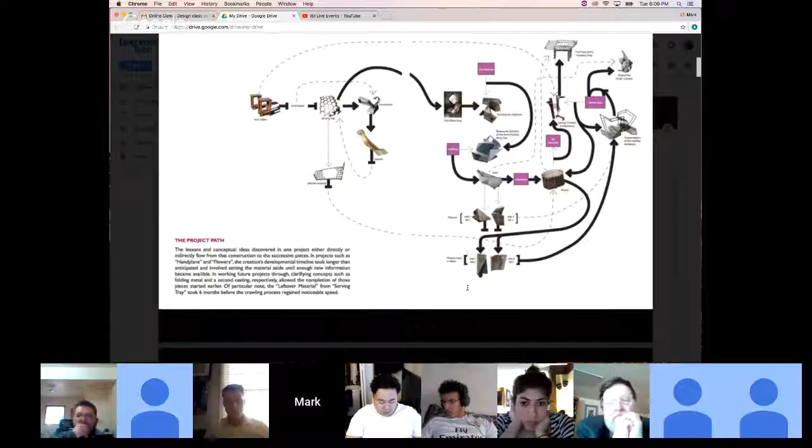This is kind of a diagram that talks about the project path, or the critical path, that the process of design took them in, and they took a few moments to document that path in a graphical way, and I thought that was a fairly interesting approach.

I've always loved this one. This was from a few years ago when we were dealing with missing middle housing.

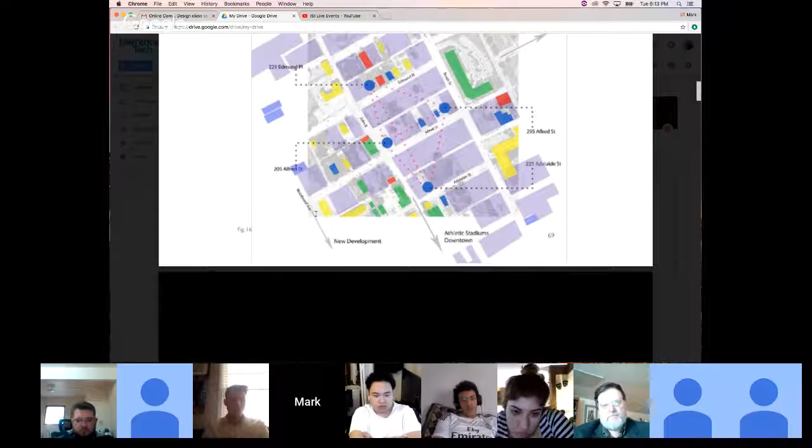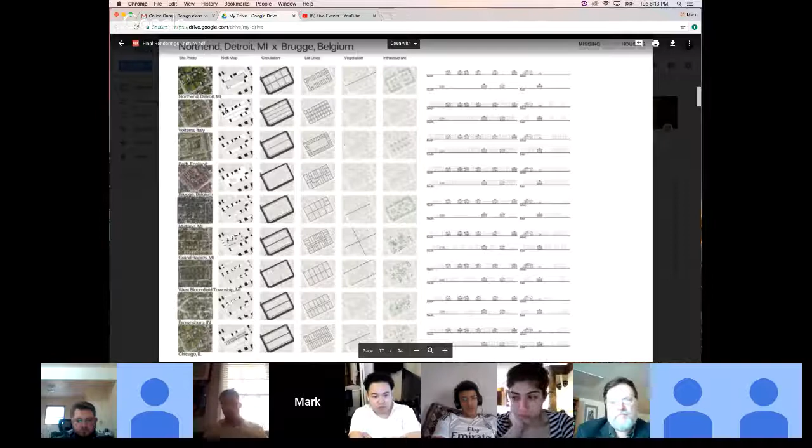Case studies. I love this one because it takes a look at a whole bunch of places like Volterra, Italy, Bath, England, Brugge, Belgium, Midland, Grand Rapids, and West Bloomfield, Michigan, to name a few communities. And it shows us what they look like all at the same scale, so that we can understand those communities relative to one another and understand them by comparison. This is an interesting approach.

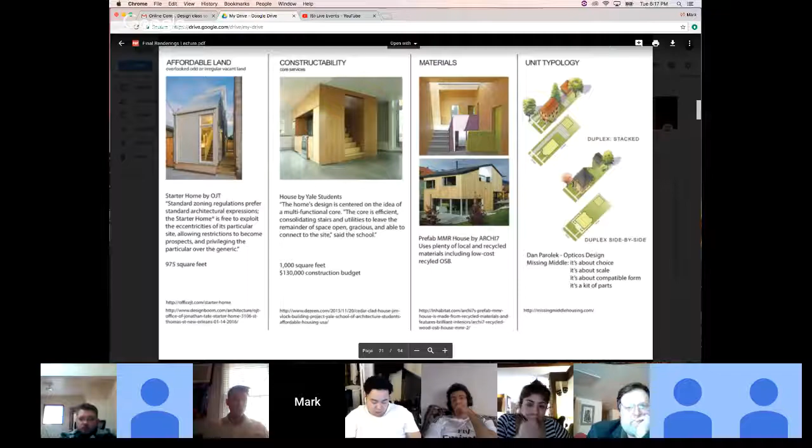Talking about program, the agenda for a building in terms of its use and square footage, and how you document that, and how those uses and percentages relative to the distribution of that program throughout the building can be graphically measured and quantifiable.

Again, the palette here is pretty restrained, but it's fairly consistent. And sometimes that program can be rendered or described in 3 dimensions. And sometimes it can be described in color, like this bar graph off to the left. Each of those colors indicates a relational value relative to the overall. So the program and area distribution chart on the left relates to the architecture on the right. And the palette here is off the chain. It's really, really beautiful stuff.

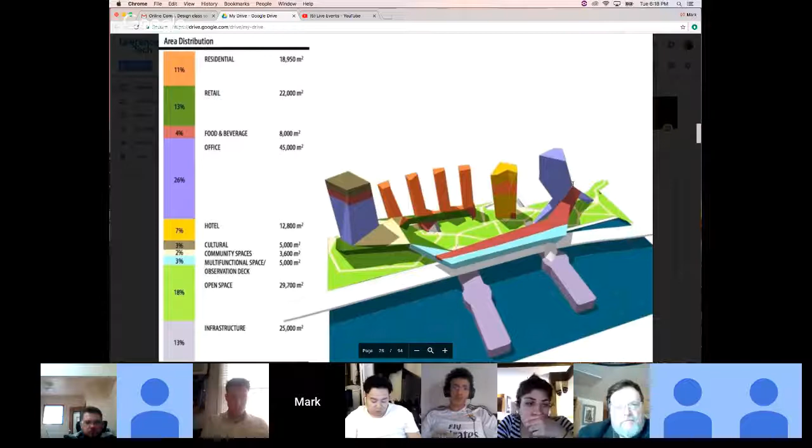Conceptual design strategies. How is it that architects actually illustrate the things they're thinking? A lot of us maybe just sit down at the computer and somehow start drawing there. But if you look at what architects have done before, they have other tools to create the sort of juices to create the possibility of making creative outcomes that are maybe a little different than simply moving right into Revit to start designing.

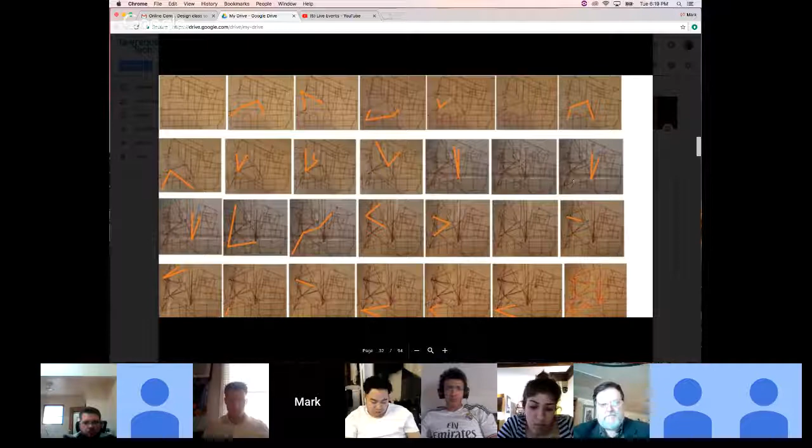Looking at variations on a site and how one can understand the sort of overall order. Or looking at iterations. Iterations are variations on a theme, and it's important that you take a moment to document those iterations to show us the sort of infinite possibilities.

Looking at iterations by showing how a concept, or in this case the idea of the Toronto stack, can be modified or changed, showing how that can happen in a very simple diagrammatic way.

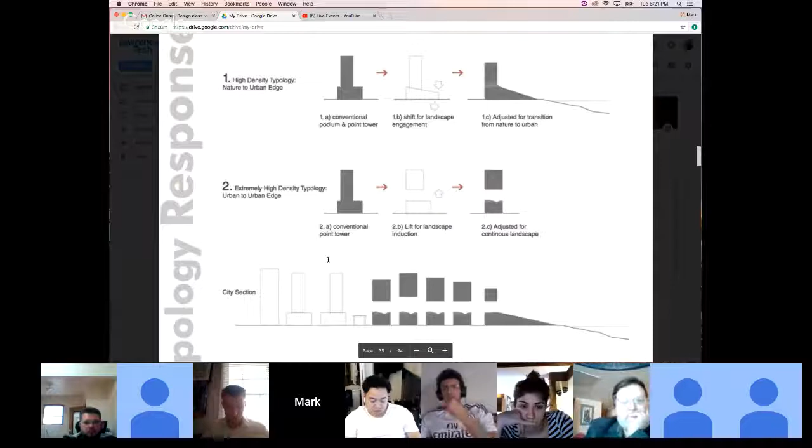Here, looking at how a mass—someone's knocking at the door—how a mass can actually be described and how it can go through a series of subtractive moves. So you're seeing that happen in this diagram, and you'll see that in another moment.

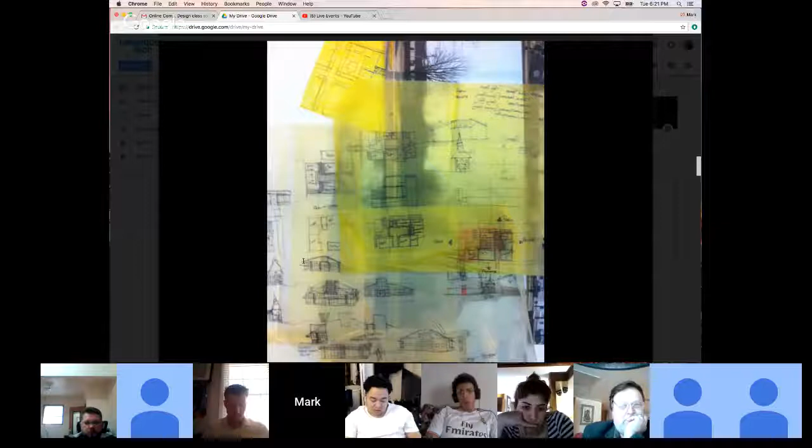This kind of brings a tear to my eye. These are hand-drawn drawings on onion skin, showing thinking through the end of their pencil. This is a beautiful drawing just showing the city of Cincinnati, showing major circulation routes and connection routes throughout the city relative to the river.

Here is a site plan that is actually printed with acetone onto a sheet of MDF board, which is the very desk I'm sitting at, which then has a series of other objects like the legend at the bottom and line work with strings to show connections. A beautiful drawing—a site in Anchorage, Alaska, showing the downtown core and the subject site.

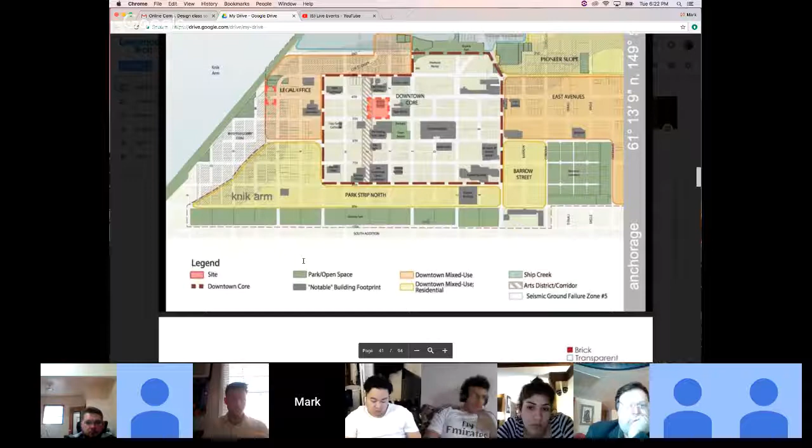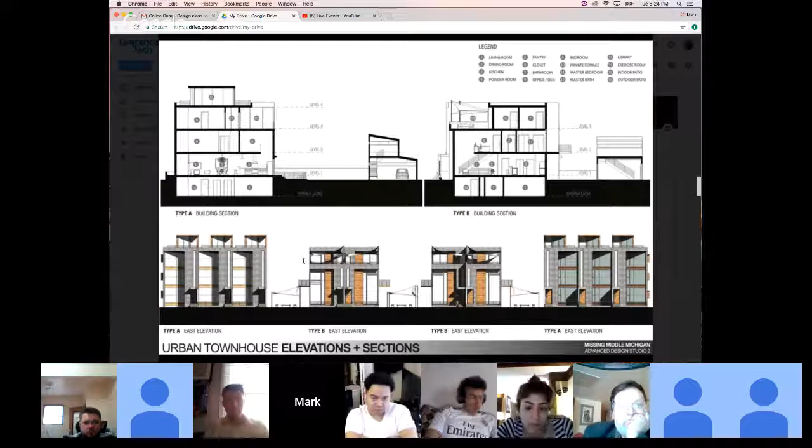Here's an elevation and a section operating at the same time. Notice how the background helps to contextualize the architecture. It gives it a ground on which the section can sit.

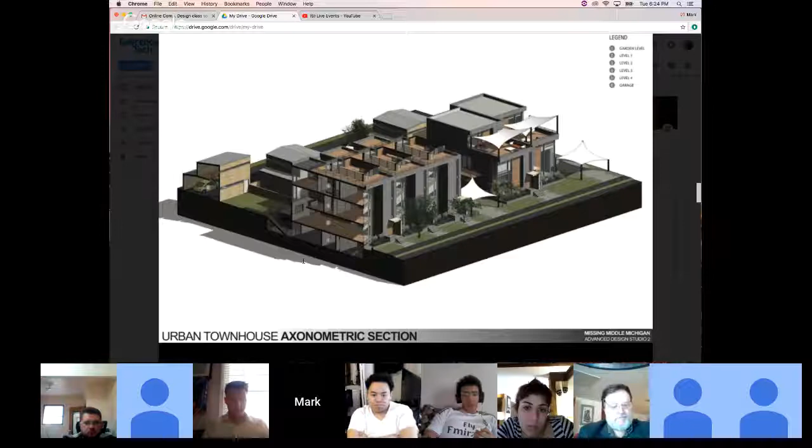So again, the expectation is that you're producing this semester some of the most beautiful, thorough, comprehensive work in your portfolio, because we expect it from everyone else that came before you.

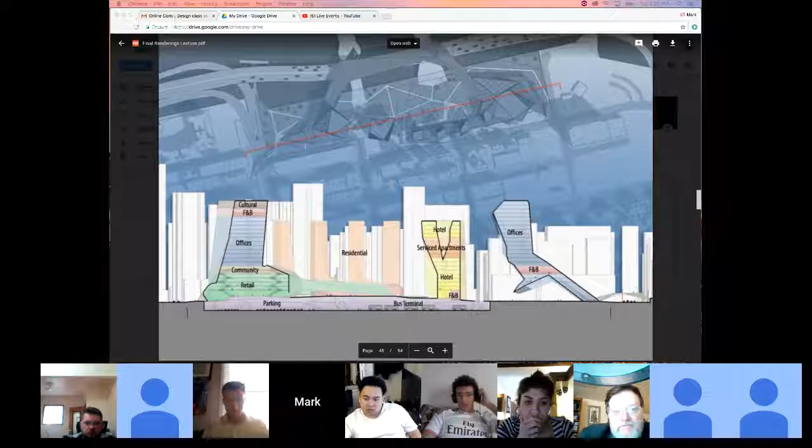There we are, we lost you. I want to make sure we get the screen back. Okay, so the section here begins to show again the site plan beyond, and it's a beautiful drawing, suitable for framing. Can everyone see the section drawing still? Thumbs up? Nope, I've got it on screen share still. Click on the screen share icon on Mark's image. Is that better? Yes? Got it. Yes, working for me. Okay.

Sometimes these drawings are more conceptual, like this one. Sometimes they're more traditional, like this one. And what's interesting here is that this section drawing through a small intervention is also an elevation drawing.

This is actually several years old now. You know, this is kind of intriguing. This is a drawing that reminds people my age of the old blueprints where everything was printed white on a blue background. And this Revit drawing was created in much the same way to evoke that sort of historic document.

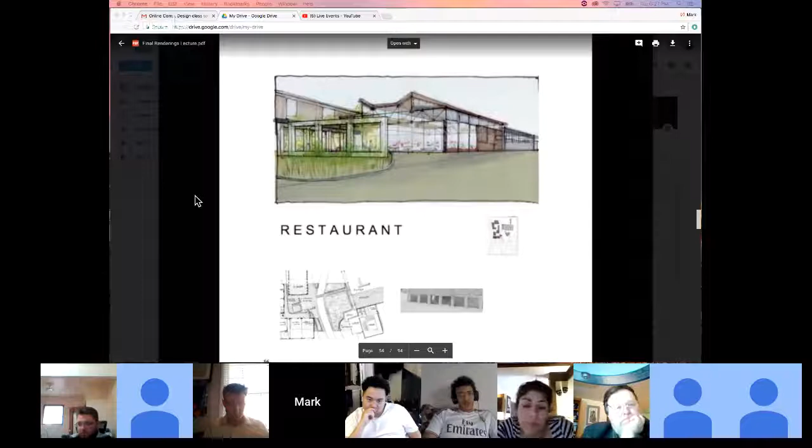The media, you know, these are hand drawn, colored with marker and pencil, and then taken into Photoshop to stitch them together. This was magic marker and colored pencil, a quick sketch that just shows the essence of what Joseph was trying to get at in his project.

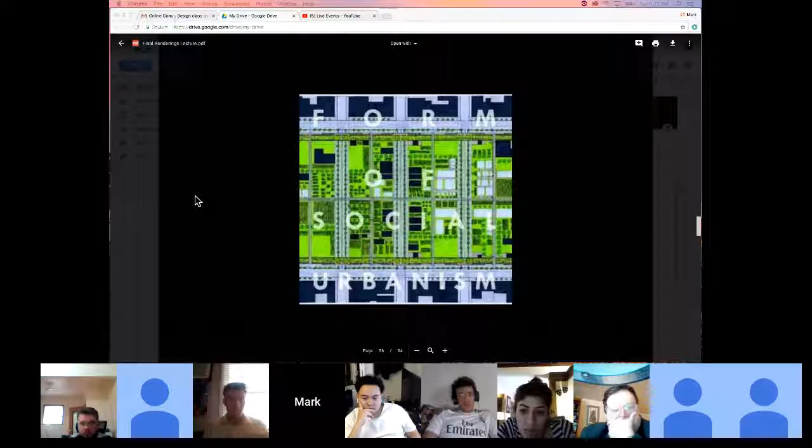This was the cover of Cody's book. So a site plan and a figure ground drawing became the cover of the thesis, as is the case with Rami's drawing for Cleveland.

A collage drawing where a place in Detroit has three sort of elevations to contextualize the site. So there's an elevation of photography here at the left, below shown upside down, and at the top also shown upside down, because the drawing is meant to be held in your hand and rotated to be viewed in somewhat of an intimate way.

This is both printed on board and then layered over or woven. So the site plan is actually a physical three-dimensional model. This is downtown Cleveland.

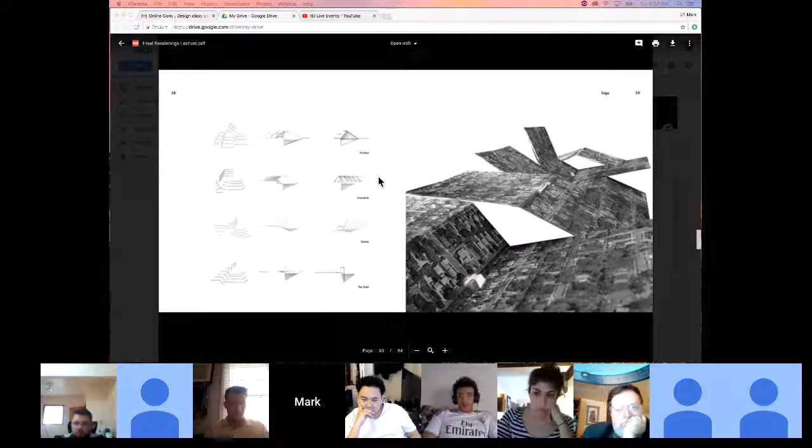This is taking the site and printing the aerial site plan on it and taking it through a series of folds to show what Caitlin was interested in exploring.

This was a student that took beeswax and took it through a process of some sort of disturbance to create a new three-dimensional iteration. Here's the Cleveland project, right?

Simple materials, like just a poster that they found in a garbage can and slice it, plaster of Paris and MDF board, metal - be careful not to cut yourself - cardboard, literally box cardboard from your Zappos shoes order, and taken through a series of disturbances. This is foam core.

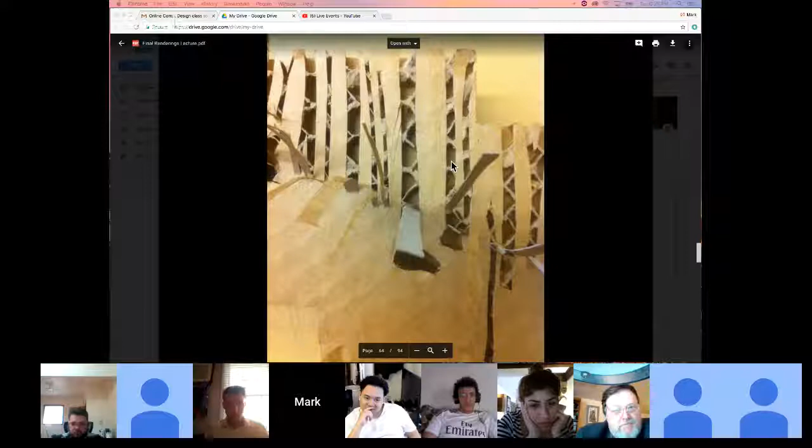These are terrific ways to delineate things. Plywood from your wood shop, right?

Full size - this is Irena's project. This is a full-size model.

Many of you will be doing work that makes it very difficult for us to select your work for fine grain. So this is a fine grain submittal. This is after the studio is over, and if you're nominated for that, you'll have to go through another iteration and pull your work together into one board.

And so this is one of those efforts where the whole project had to be reduced to one physical board. And then the renderings - so this is sort of like a blend of the Old Testament and the New Testament, looking at old school Revit renderings, old school SketchUp drawings, and then maybe some more recent things, right?

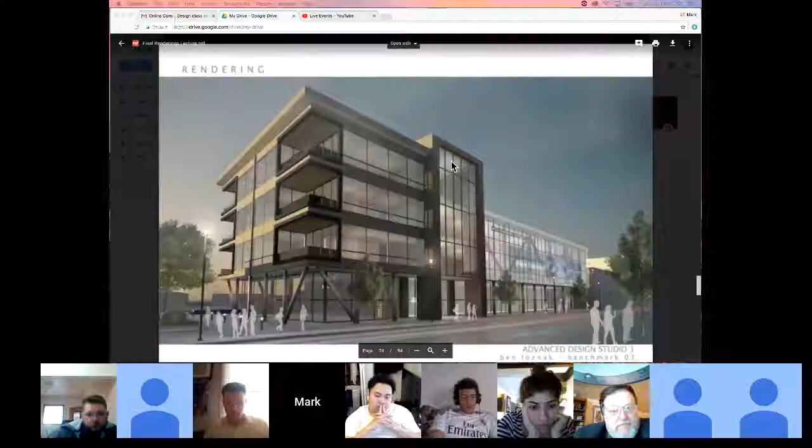These are all seniors and graduate students. This guy learned Lumion in one week.

These two are from a young lady. She's actually a practicing architect in Columbus, and she learned Revit in one semester and took Revit into rendering. These were her very first renderings ever in Revit. This one is actually a rendering in Revit taken through Photoshop.

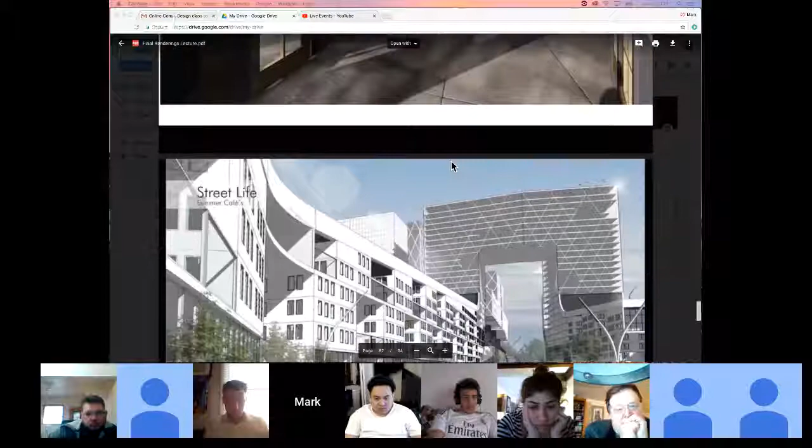This is the Lumion guy, another old guy that learned a trick. Old dog learns new tricks. This is the Toronto Stack project.

I appreciate this one because it's partially a perspective, but it's also showing kind of the cost of materials. This is the site section.

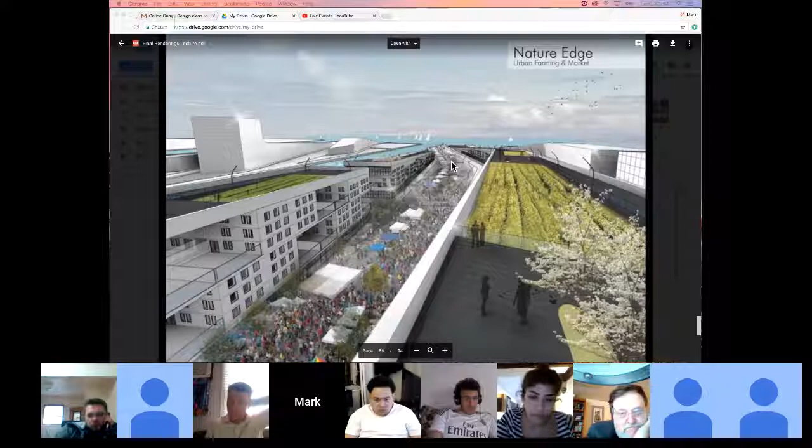And showing your building in moments of the year or moments in time. This one is a moment where the development was taken as kind of like a farmer's market. This one's taken, for instance, in the summer. This one's taken as a building is developing over time. This one's taken at a summer concert scene, but it doesn't have to be the beautiful North American weather. It can be wintertime or it can be fall.

Here's some fall shots. Night shots are particularly compelling - that moment, the twilight, the gloaming hour, is a particularly compelling time of day to show your work.

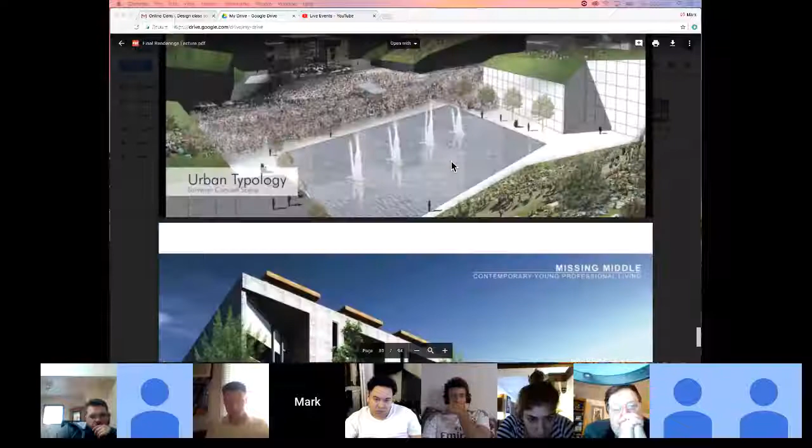Yeah, I wanted to go - actually, I should show you this, I should linger on this for a second. I wanted to show you these so that you appreciated everything in the context of what you're about to do.

So you're all going to be doing, you all have until next week to pull your projects together in such a fashion that they have colossal comprehensiveness. This benchmark review has higher stakes on your grade because it's a more important benchmark. It's kind of a dress rehearsal for benchmark 3. We don't expect everything to be done, but we certainly expect that you're dealing and confronting with lots of issues that are not only design-based, but technically based.

So I wanted to make sure that you saw these renderings so that you saw what you're up against, that your classmates before you - in some cases that's like 10 years old, 8 years old - but in many cases this is work that is exemplary. I'm looking forward to adding your work to the next edition of this talk. Definitely start thinking hard about those shots, and I'd be interested to go over those viewpoints with you, those perspective points, as you make your way into the coming week.

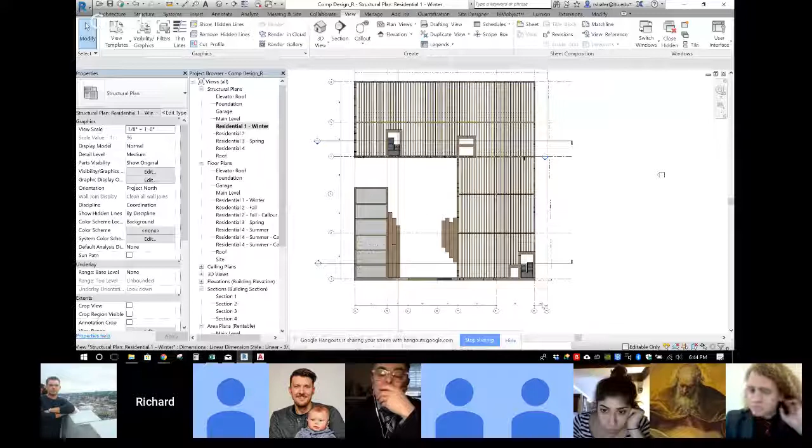Go ahead. Oh - so hold on, let me show you the details that they have. They only have this one, which is only a single floor. So I'm gonna contact them to see what they do for multiple floors. But as you can see, they kind of just anchor it into the wall, because the walls, with the Sirewall, they're reinforced with steel. So they have rebar running through them. Let me see, not this one.

So most of the time for load-bearing walls, though, you have fairly closely spaced joists or purlins. And when you have a beam with a large spacing on it, you're putting a large load on that point of the wall. So it might be a safer alternative to consider that to be like a pilaster - in other words, where there's a column in a sense built into the wall at that point, or a thickened wall. Does that make sense? Yeah, I would probably suggest that based on what I see.

Okay, the idea of using a steel plate to bear some load is not a bad idea. And the reason I bring that up, Richard, is because when I recall what you guys showed for sills and headers at window openings cut through these rammed earth walls, they had a similar spanning condition, right? When they had an opening, they treated it with a different material so that water didn't get into that opening from below at the sill, and the rammed earth had something to sit on and translate the loads out to the jambs so that it could return to its more vertical direction after the opening.

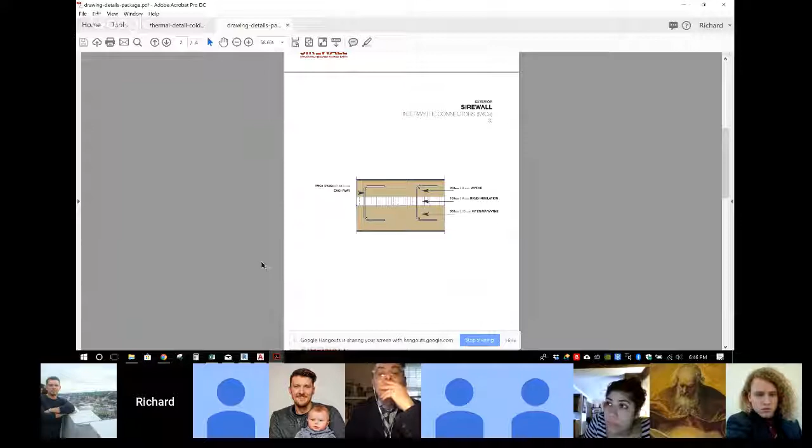Do you guys have a section through this new proposed structural? We have a preliminary one. Let's see it. Not really, or just open it up, and we can talk through it.

I just want to make sure I understand, because when I looked at the framing plan, Richard, it looked like those trusses that comprise the second floor - or is it the second floor that you took it at? - that those were fairly close together? Yeah, I have them at 16 inches right now, before I do the calculations and everything, just for prelim.

Are those like a pre-engineered wood truss or steel trusses? They'd be the wood truss. I looked in the Studio Companion book, and I got the sizing and stuff out of there. Is this a CLT system? No, it's not cross-laminated timber? No. Okay.

I haven't copied it up to the other floors yet. So the rammed earth goes up past Residential 2? This one right here is just the timber column. I haven't done the rammed earth yet there. That column was taken, it's on the section on the other side, right here. Gotcha, okay.

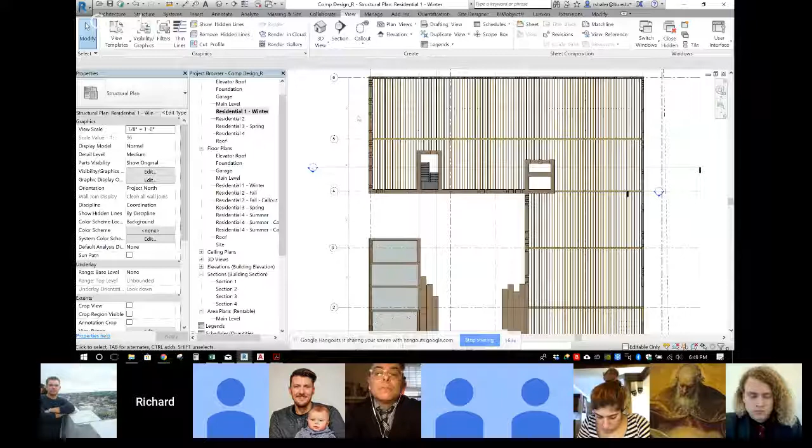Waffle slabs are more expensive because of all the coffering, and I'm not sure I've seen them used for parking because of that cost expense. This would be above the parking, so it would just be for the main floor. Again, unless you're hitting that 45-foot span limit length, I would probably not use it. I think the cost will go up.

I'm not sure you're going to gain that much from it. At 33 feet, you can span it with a two-way or one-way slab with beams. Okay, that makes sense. To answer your question about two-way or one-way: if it's a rectangular bay where there's clearly a long dimension and a short dimension, probably one-way. But if your bays are squarish in profile, then I would say two-way.

The majority are rectangular. There are a few that are really short, like this one right here - short and long, but other ones are like this that are square. Again, if they're predominantly square, use a two-way. If they're more rectangular, where the difference between one side and the other is roughly 1 to 2, then use a one-way.

Cody, did you want to talk about the HVAC? Yes, do you mind if I screen share?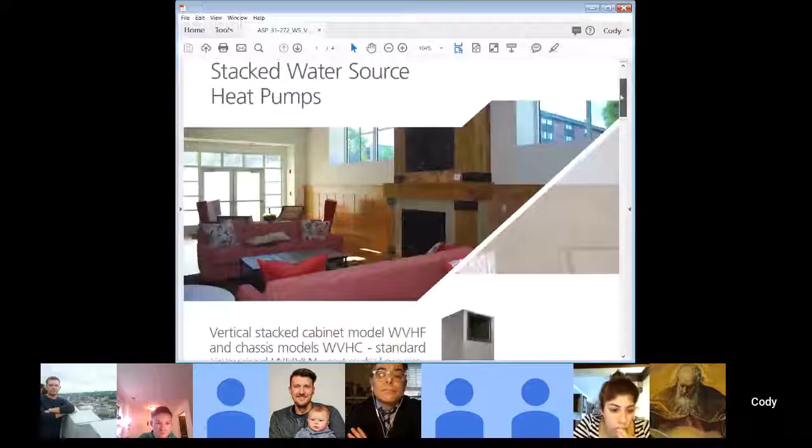The stacked water source heat pumps - so we are going to move forward with that for the heating and cooling of our building. As you can see with this diagram, that is a system that, as the name implies, is a vertical system, and we would be able to move it through all our rooms in the same location. It's one of the more efficient systems that we could employ within the building.

I don't have anything on Revit yet, but if you have anything to say about a system like this - I think this is consistent with one of the options we gave you. I think you just have to make sure they are placed on an outside wall, or is that the case?

The question I was going to ask is, do these things draw air in from the location on each floor, or is there a source where we can determine where it draws in fresh air? As I said earlier, if you put them inboard away from the exterior wall, you typically have to have a line of connection with a duct that pulls in air from the outside. Somewhere the system has to pull in fresh air and has to expel exhaust air. Frequently these systems tend to be along an outer wall because then there's no ductwork chase needed - you just simply have a vent or screen on the outside wall adjacent to the unit. That's my experience with how we solve that issue.

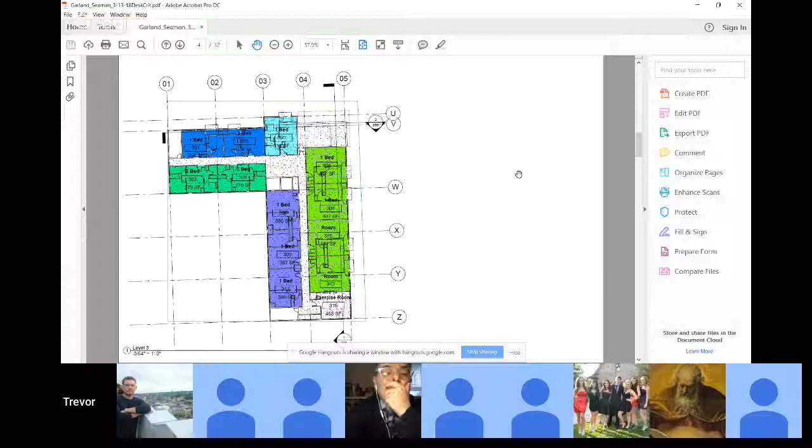So we have it down to 7, and then 1 to 2 bedrooms in terms of square footage. So this would be level 2, and they're color coded based on the unit square footage and orientation — that denotes each of the 7 different sizes and shapes of units that we have. Going up to 4 here, and then 5. This is still kind of a work in progress, but we have that palette we've referenced in earlier presentations that is going to correlate to this, and be laced into a comprehensive presentation so it'll be an easily recognizable reference.

So can you guys zoom in on the 1 bedroom near column W3, the purple one? I see. What is the space you're entering in when you go into unit 507?

This space here? Yes, that'd be the kitchen/living area. Would exist immediately to your left, and then the living room would exist on the exterior wall. Okay, and then the sleeping room is where the 386 is. The bathroom is behind the closet.

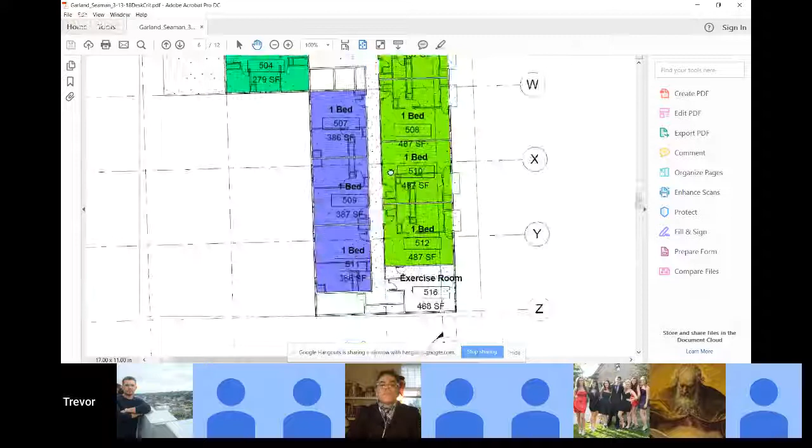I have a question on the lower right corner, which is the exercise room. Yes, I guess a question for Professor Farlow is whether that kind of space would be given away to a unit, or would you give it to a common area? So we've talked — I saw that and I raised my brow as well, and I anticipated that we would be talking about this.

If I had any influence on this conversation, either working with these guys in the office, or working for the owner group as their in-house architect, I'd need to be really persuaded to give up that prime real estate for an exercise room on such a high profile condition. Bear in mind that east facade looks at City Modern Detroit and towards Eastern Market, and the south facade, while it only has one window currently, could have more and could look towards Ford Field. The only thing is that south facade is looking right at the other building.

I understand that, and that's how you have to contextualize your explanation—that's the case you have to make. Yeah, that was my reasoning, to give that south wall so the units across the way in that building aren't staring into the units in our building, and vice versa.

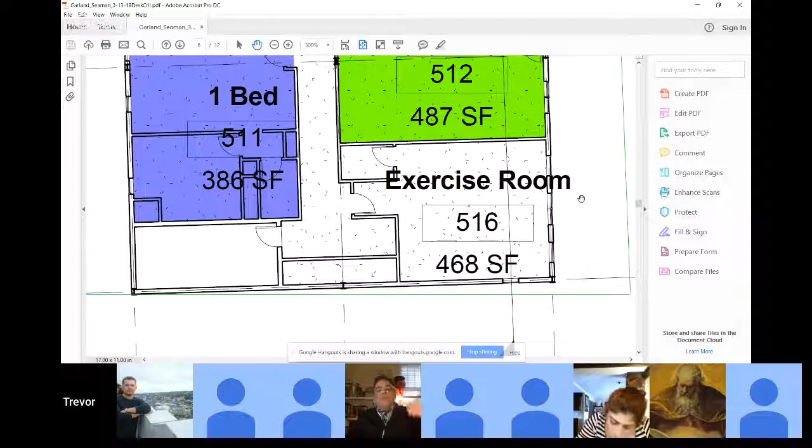We would give that south wall to the public spaces, the egress spaces. So Alec, what happens on like 416 or 316? The units vary between an exercise room and a laundry room between floors, so every other floor there's a laundry and every other floor there's an exercise room. So it's a vertical public amenity.

The opportunity might be for you to treat that differently in terms of fenestration. The other opportunity is to change the mass, let it step back a little so it reads differently, with a material differentiation, given the common area role that bit is playing in the architecture, to emphasize its difference.

Can I ask what happens to the left of Unit 504? Keep going down and left—the right two here is bedroom. What happens there? That's an outdoor terrace with access to views of downtown. Is that only unique to this floor? The floor just below it, the 4th floor, has an indoor space with a smaller terrace as well.

Can I ask why you didn't consider moving the 2-bedroom to the left and putting that open space contiguous to the lobby and elevator? The reason I put the community terrace to that far corner is because it has the best visual access to the RenCen and downtown, because anywhere else in the building, the view is blocked by that 10-story apartment building to our south.

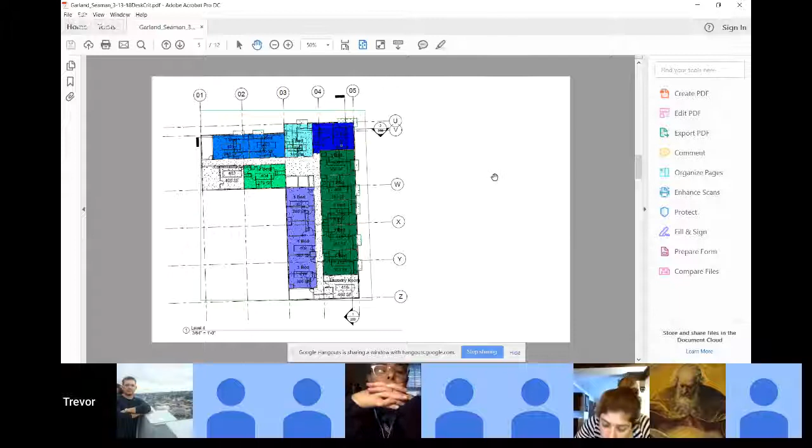And 6 of them are occupied on that wing. Going back to where we were finding the basis for our organization of these spaces, since we can't have balconies on the inward-facing units, the courtyards at least give some presence for those residents who don't have that opportunity yet.

I would also ask you to think a little about the noise and acoustic issues for Unit 404, because on one side is the elevator lobby and the other side is the community room. You understand my point? Yes. I'd say if things are too loud, that's a unit no one is going to want. If you could push it to the outer edge, then you only have one side adjacent to or butting a community space.

Yes, definitely—I'll defer to Professor Farlow on that. I don't know, we can look at that. Let's let you chase it this way. I appreciate that you have a position on it.

I don't know if 404 is better as 2 one-bedrooms, or if it's better as a 2-bedroom where the master is—it looks like the master is maybe the bedroom on the right, closer to the elevator, and then maybe the other room is a guest room. That's maybe how, as the sales team, you might unpack that. That's how I envisioned it in my mind, the master bedroom on that inside.

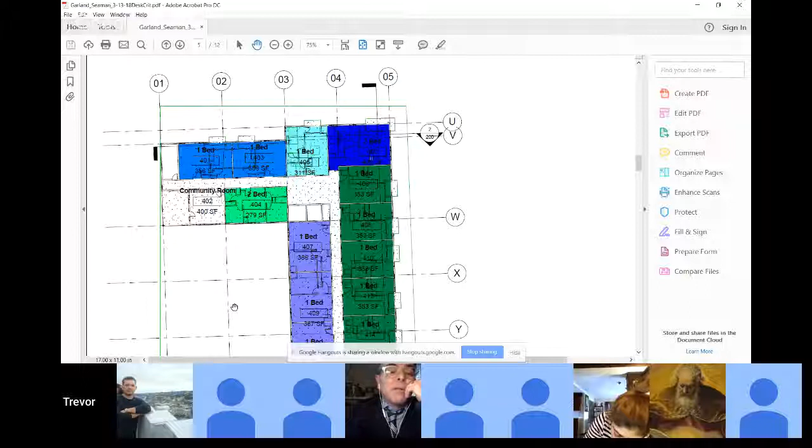It happens along the X line, for example. It happens along the 04 line. So, I mean, in some cases, I think the column in the unit is kind of like a virtue. It could be a virtue.

Yeah, the way I organized it was based on fitting these rectangular units into the facade, the exterior construction, with as few different versions of units as possible, if that makes sense. Because in previous iterations we had 14 different types of units, different shapes, different sizes, and the opportunity on that south wall of the westerly wing is to divide those spaces evenly so we get a matching unit.

Right. So you're learning how to do this, and it's a lot of fun, and you begin to appreciate the variations that this can actually produce. So can you guys maybe zoom in on U05? Can we just look at the relationship of structure to the outside walls?

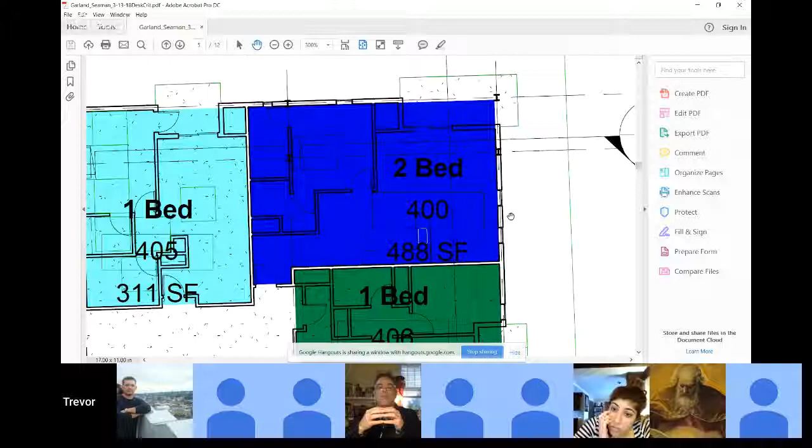Can you guys cut a section through this, or do you have a section? We need one through an outside wall so we can look at a column line relative to the skin. Did you cut one through the outside? We've got a building section. Yeah, that might work. There we go.

And does it have the columns and column lines shown? So the column lines—we actually linked our structural model in, and we were having some issues with the display of the grids, so I just turned them off to make it a little bit less confusing. Look on the left-hand side.

I think the easier thing for you to do might be to let the column lines stay where they are, but let the wall slip out past it. If you don't have a property line issue, I agree. We're already set back on all the property lines right now, so I'd flip it forward, slip it out. Yeah, I agree.

This conversation we're having with you two, Alec and Trevor, is something I want all of you to audit your own sections and floor plans for. I want to be real clear that there's no columns embedded in the exterior wall construction. They are within the volume of the space itself, within the dwelling unit or the retail unit, and the outside wall is free and clear of that—the real reason is so we have a difference between skin and structure, but also so we don't have thermal conductivity issues that bring the cold into the building.

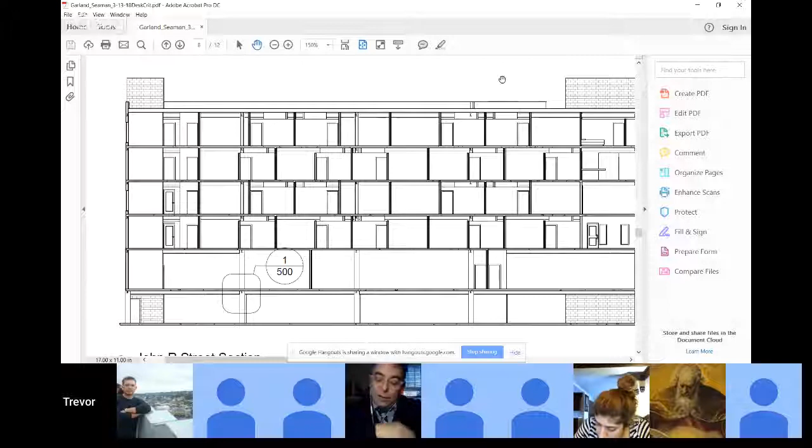Yeah, this is the week where we find this mistake every time, so you're right on time—there's plenty of time to fix it. This is the way it works in an office, and many of you know this: some bonehead boss like me comes around and says, 'What the heck are you guys doing, don't you realize that,' blah blah blah, you get the finger wagging, and then you have to go back and recalibrate the whole model to make sure everything impacting this issue is resolved. That's what you have to do in offices. So you have to be kind of alert to that.

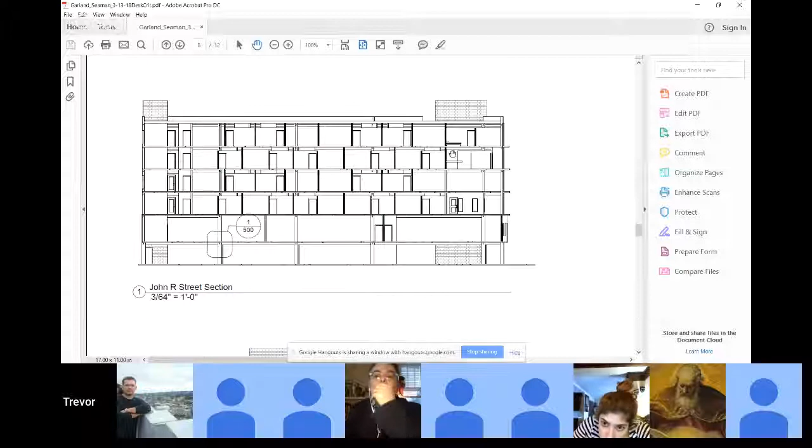Yeah, nothing I think will hold us up very much. I think that all makes sense, to pull the exterior walls out just a tad. And fortunately we gave ourselves the tolerance with our setbacks early on in the project to permit us to do so.

This section is kind of bizarre to me though, because I'm not sure where the grade line is. Looks like the grade line is the bottom line—is that correct? No, it's actually right here. That's what I thought, the parking. So graphically those things need to be tweaked too, so they read as sections, with the streets added in also, showing some cars driving in the lower level, people on balconies, and there's a slab thickness there—bingo.

Let's see, can we look at the elevations? Yeah.

Is the stuff at the ground floor just all glass? Is that why it's open? That's actually where the retaining wall is going to come in. It looks like it's solid to me. But the ground line is really at the 0-0 line, correct? Yes. I'm almost looking like it doesn't seem that there is much glass on the ground level.

Am I mistaken? The rectangular lines on that ground level, on the upper, in the north elevation—those will be glass, I just haven't placed them. And then again on the south elevation, all the glazing hasn't been completely determined.

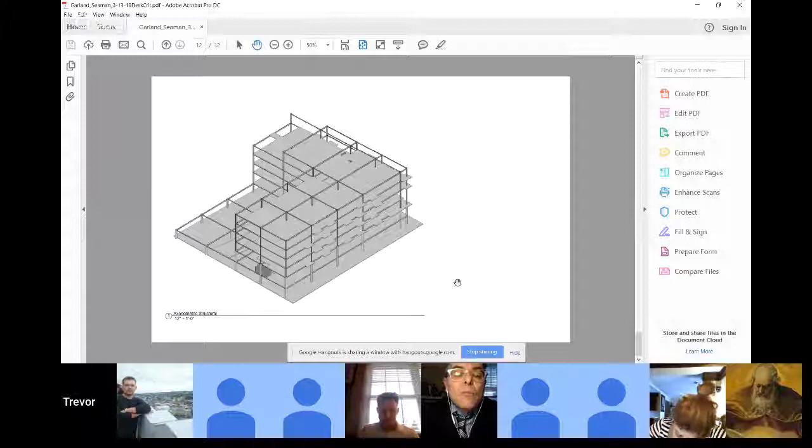What are some of the spans in the system? Some look quite long. These up here are 40, 46, 40, 48. That's the longest span.

What is your structural system? It would be composite steel and concrete columns, and then we were considering the post-tension concrete slab to work at those longer spans, but I've been struggling to find any really conclusive research about their spanning capabilities. Mostly what I've seen is just the relationship between the thickness of the slab and the span, but it was all about waffle slabs.

So is that post-tension system an all-concrete system with columns and slabs? For the floor plates, we were considering concrete for the floors, and then the columns on the ground and underground floors—the steel encased in concrete on those lower floors would continue up so that we could have a little bit more of that space for residential programming.

I would think that a post-tension system would be a lot like precast—it's got its own set of rules, so to speak. So I would probably be as familiar as I can with that system. I'm not sure, is it covered in the Studio Companion? It might be, it was briefly covered. There were a few little diagrams, but it wasn't sufficient enough to really understand it, I don't think.

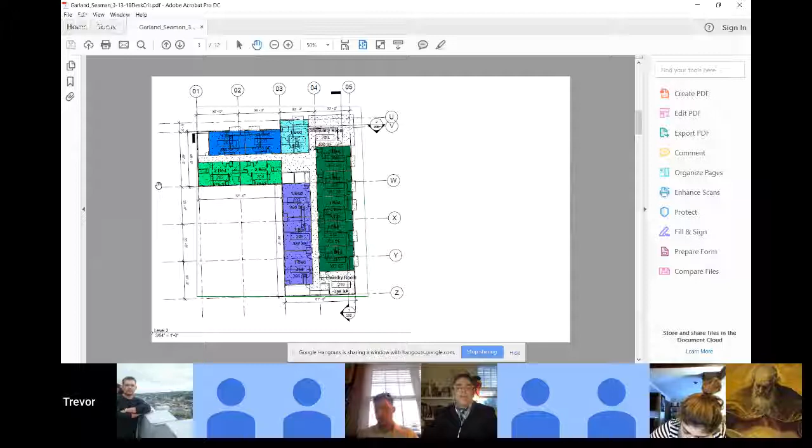Yeah, this is an older snapshot of it, but this is the basement floor. Now we have the ramp that's going to go through here. I thought the ramp was in the middle, like between 2 and 3. No, it is now. Oh yeah, this is a dated image, a dated drawing.

So I can't really help you now because I don't know what you're trying to do with the parking level yet. Right now, I'd say you got to be balls to the wall to get that resolved, because you may need to introduce a V.5 column line or a V.3 column line that's maybe flush with the south wall of that stair.

Yeah, I'm thinking make this work. I was thinking putting one at the demising wall of those rooms of the units upstairs. But again, it sounds great, right? In concept, sounds great, sounds like it could be workable, but I don't know exactly what the layout is. I can't remember what it looks like.

So I think you ought to get on that now, and then let's pin that up tonight or tomorrow. Are you talking about the parking layout? Yes sir, yeah, let's pin that down now, tonight or tomorrow, because you really can't spend any more time massaging that.

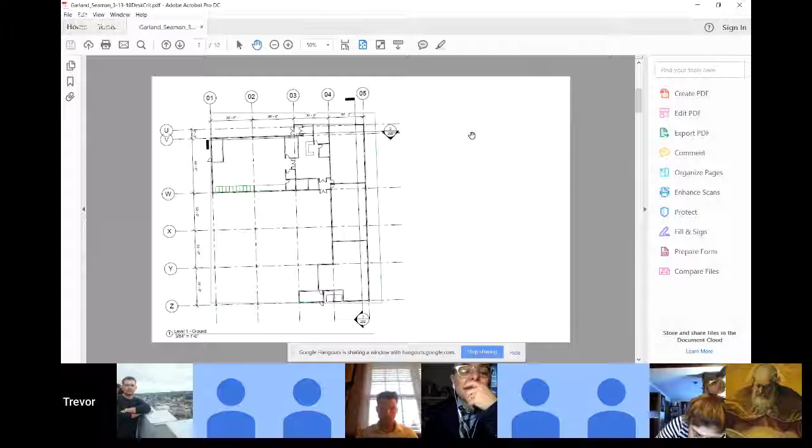I wanted to ask Professor Farrow a question. Do you have any idea how the cantilevering capabilities of that post-tension slab could be, so that if we do introduce a column or maybe slide column line V down a little bit, what we could expect to achieve on the outside of it?

Not offhand, it's not a system I'm that familiar with. What I'll try to do in the next few minutes is send you some information that you can take a look at - it might help you with some decisions. I would think that small cantilevers will probably work, meaning 10 to 15% of the span without much of a problem. Okay, I agree, all right.

Alec, do you want to touch on the HVAC at all? Sure.

You just go into the floor. Well, I don't know if the things will cover it up. So I reworked the HVAC a little bit to reflect what you had previously stated, that we need a unit-based system rather than a central system, even if it's by floor. So I provided the spaces on the balconies. Yeah, I see for that - the VRF units. Yeah, like the box. Yeah, the box just above the W. Right, right.

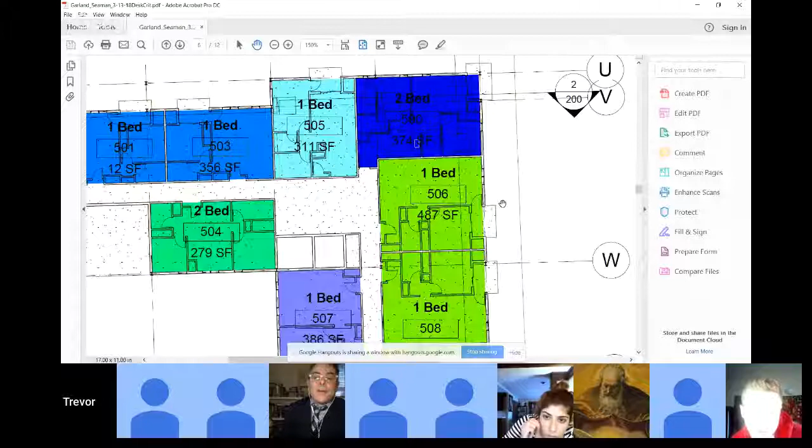Where it started running into issues, where it became a little weird, is on the interior, because we do not have the balconies - those boxes kind of... Right, and that's why I was suggesting in one of the other schemes that if you look at where your closet is in the bedroom - in some cases, let's say I'm looking at the bedroom in 507, right? Zoom in on that. Right. Yeah, if where that box is, the closet actually was in the wall that separates the two rooms, so that it kind of was an extension of that box.

Right, it would fit cleaner in that sense, right? It's just a question of, you'd have to decide how that works in terms of internal space planning, because now that makes the rest... that would push the bed to the other side. Right? Yeah, it might. But I think you can do onion skin layouts to show variations on that, right? I think that's another option, is to have put the box in the living room, and the kitchen, for instance, could have gone on the wall where 507 is printed, so it becomes one continuous condition within the room. And then you could actually imagine how someone could work around that - maybe they'd have built-in furniture or something in that, right? Does that make sense? Yeah.

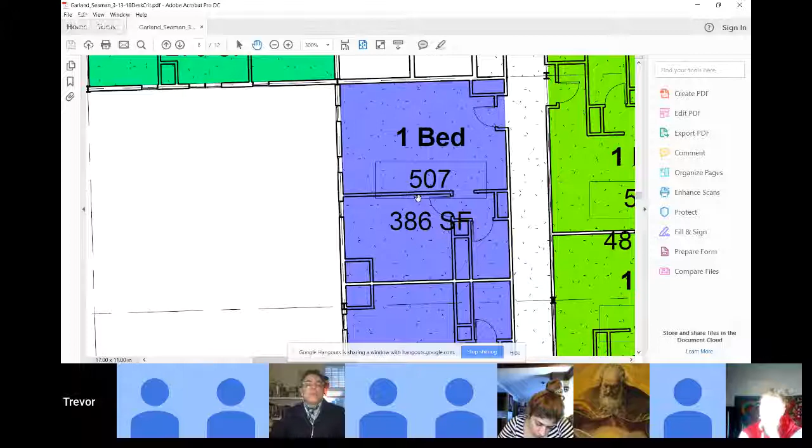But it's not, like I said, the end of the world. What I would say is maybe potentially an issue here, and that I noticed in the elevations, relates back to HVAC, is the size and number of some of these windows on the non-street side facades. I feel like these units are underprivileged in their amount of glazing, particularly in that 507 unit, where it's only one window in that bedroom, and it's a small, narrow one.

The other point I would make about the location of that unitized package unit: if you were to put it in the wall that divides, let's say, the living room from the bedroom, then you might be able to consolidate your ductwork. Because on one side you'd feed the bedroom, and the other side you'd feed the living room. That might be a more strategic location. Then you could split the thickness of that wall between the two rooms, meaning less intrusion on one space. And maybe it becomes a built-in bookcase on one end.

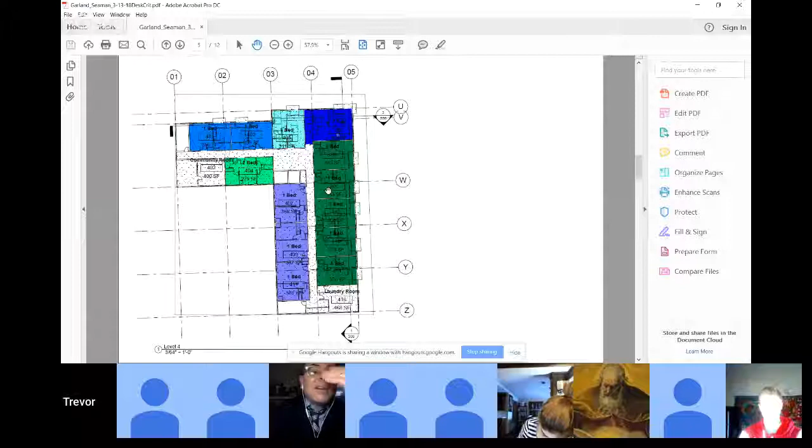But these are nice, simple units. I definitely appreciate that. Can we go back up to the 2-bedroom at the Notch on Alfred, or the 1-bedroom? Maybe it was another level. I'm trying to remember. Maybe it was the 2-bedroom on the corner at 04, the dark blue one. Yeah, that one.

Zoom in on that little closet. That's the bathroom there. What is that room behind the bed? That would be the restroom, that's the bathroom, right? And then the room that his cursor is on now is a walk-in closet.

So, getting back to window sizes, I feel like some of these windows can be bigger, but that's something you have to validate on the elevations. That's one thing. But then also, when you go through the meticulous move of the columns so they're not in the wall but inside the space itself, that door into the bathroom has to slide closer to the bed, and then a developer is going to start saying, do we need doors in all of these spaces? Do we need a door in the closet, for example?

That door times 4 floors is 4 doors, and there's probably 12 rooms on each floor. You know what I'm saying? That's the way they start thinking: how can we save more money? So maybe there are some rooms where you can get away without a door, because it's always going to be open. I think closets are those kinds of rooms.

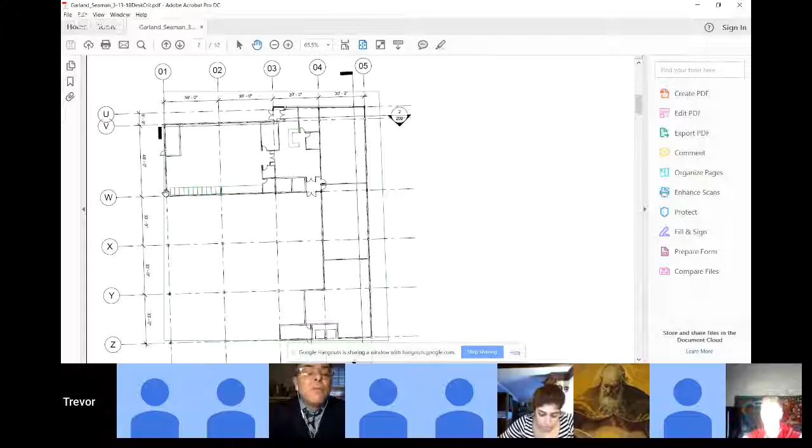So what happens on column V? What happens on that wall? What's there where your cursor is? That's where I'm unsure, because we can fit all the storage behind it. Let me share my screen, if I share my screen you can see. Okay, let me go to you.

So here, this is 30 storage units, and if they're stacked, we can get 60 in this space. So the storage can get even smaller.

This is the denotation for bicycle storage along this wall, and then we have a lot more space here that can be used for various programs.

Well, do you have like a leasing office, conference room or business center? Conference room over here in the lobby, an office right here, the front desk. This is the mail room, we're going to be putting mail in through the wall. Dog wash closer to the exit, then a changing room here for the bicyclists, and then the retail in the corner.

So this space here becomes an opportunity for you.

Well, think about what you'd like to see there. Maybe that ground floor can retract a little bit, come in a little bit, so it's not so generous. Maybe you can offer up bike storage in that room and the bikes are on the facade. That might be an interesting thing. Maybe there's a bike rental shop there, for example, a kind of quasi retail space. I could be persuaded to look at that as a program.

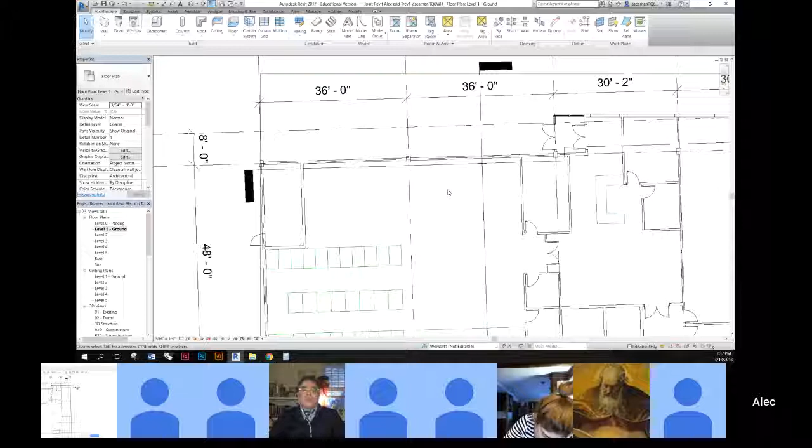But again, thinking hard about this, like you did relative to the laundry and exercise rooms upstairs, thinking harder about how these programs can activate the street and promote this building, its occupants, and the agenda of the building a little more clearly is maybe the way to answer the question of what this is going to be.

To me, it would make sense to have something that would be a community space. It would be like, I was thinking, a restaurant or a kitchen with a cafe for the residents, so it gets a sort of advertisement as you're walking down Alfred.

It might also help to know a little bit more about these rooms in terms of how they're working. I'm looking at doors to give me some sense of scale in these spaces, but how many people can go in that office, how many desks, how many chairs, how many conference tables or conference chairs can sit at the table. And if I knew that, or like the dog cleaning, how many dogs can you wash at a time, that kind of thing.

It would be helpful if you all brought up your plans to show the finer grain of the program, so that we could make sure you're on track.

But a business center might be useful, where you can go in, maybe there's a fireplace, maybe there's computers, maybe there's a coffee bar, maybe a small kitchenette, so that it's the living room that some of these smaller units you're proposing don't really have, and homeowners like me would come down to watch the golf match on Saturday afternoon, or to play bridge or whatever old people do when they play cards. So that's kind of the alternate living room.

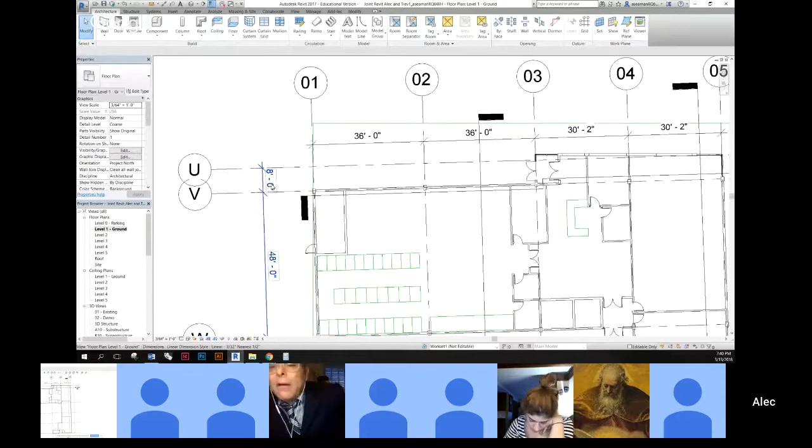Before you close out, can we orbit around the model and look at it from above?

I know Professor Farrow had some questions about the 1W column line and what was happening in those units on the Alfred leg from the south side. Can you orbit around and let us see that?

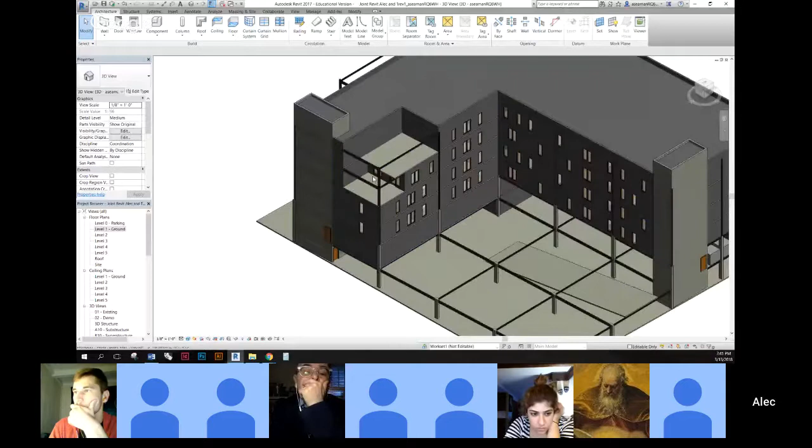Does the roof of that unit on 4 actually extend out and create a space? This space here is actually the community space, and then the unit starts past this column line. But doesn't the community space want to end at that wall, that corner? Yeah, okay.

Can you show us the hard corner at the intersection of the streets? There was something unusual happening there. Some of these columns would be removed, some of the structure cantilevered. This is the public exterior space that prioritizes the Ransom Gillis house. Yeah, that's very interesting.

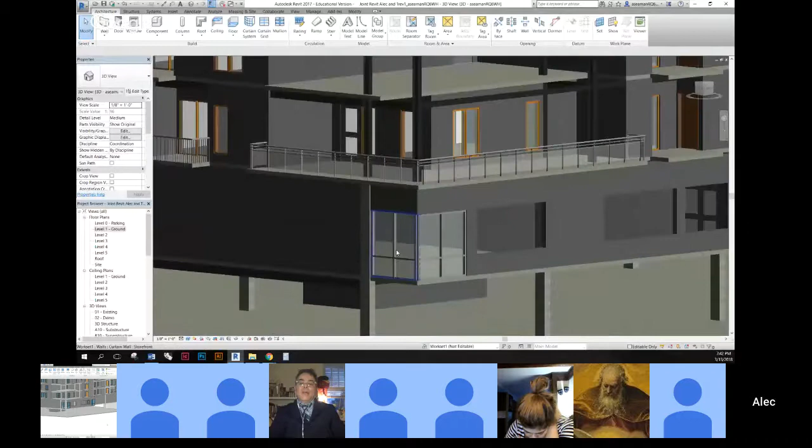The windows you're showing on the ground floor, are those retail windows? Yes, I think those go all the way to grade. I think that's how I would look at that. I wouldn't do those huge pony walls, the walls between grade and the sill line. I would extend those all the way down.

Like the corner, yeah. Because a developer will want to be able to tell a tenant, between when one lease ends and one begins, you can put the door anywhere in this wall. You don't have to cut any wall mass out to do it, or leave the door where it is. A large opening that goes from head height down to grade allows that kind of current and future flexibility.

So I would think of it in those terms, not just you guys, but everyone. Yeah, and the same goes for the whole exterior storefront system, because tenants might want to occupy a different percentage of that space, so you want them to be able to decide how much space they want. And when different tenants move in, they still want a similar expression on the outside, right? Yep.

And what were you guys thinking for the skin? So in our lab module we specified an insulated metal panel as a unitized system. For the glazing, we looked into what we could get the highest R value out of, so the most economical options were double glazing with argon encasing, low-E emissivity. So what's the metal panel - is there a spec, a company you're looking at?

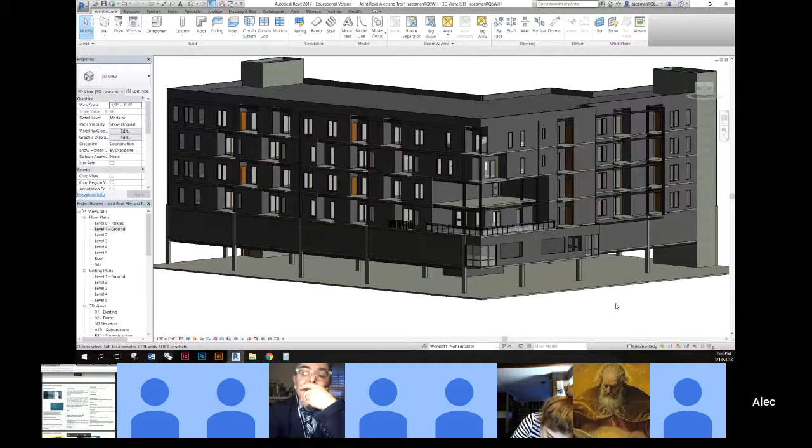Yes, it's in the lab, let me jump over real quick. Can it come in different colors, textures, and finishes? Because it's reading, guys, as - and I like simplicity - but it's reading as one thing, I just want to make sure. Our idea was to use the metal panels because they have some variants, we can change the color and texture to emphasize different portions of the building. Gotcha, so from the exterior you can differentiate between program - for example the retail, the community space, and the units.

So I don't know this line, Metl-Span Architectural Insulated Metal Panels, I don't know this company, where are they from? That's a good question, I didn't look into where they're from, I looked more into the product data and panel sizes, but I can look it up for you. I would try to - if they're not from the U.S., not because I'm promoting nationalistic sensibility, but for LEED points and a more sustainable, affordable, less exotic strategy, since metal panels can be local - even our good friends in Canada have wonderful metal panel products, Riverside Group in Windsor for example, Erie products have things there. These are somewhat local, so double check that.

But again, within one material choice, you can provide variety. My advice is to be calm—do subtle things, like change the direction of ribs or joints. Or if you're going to do all warm gray, maybe some have no texture and some do. Because you can compose a beautiful sonnet or symphony out of just a few notes, and that's something you want to start getting into.

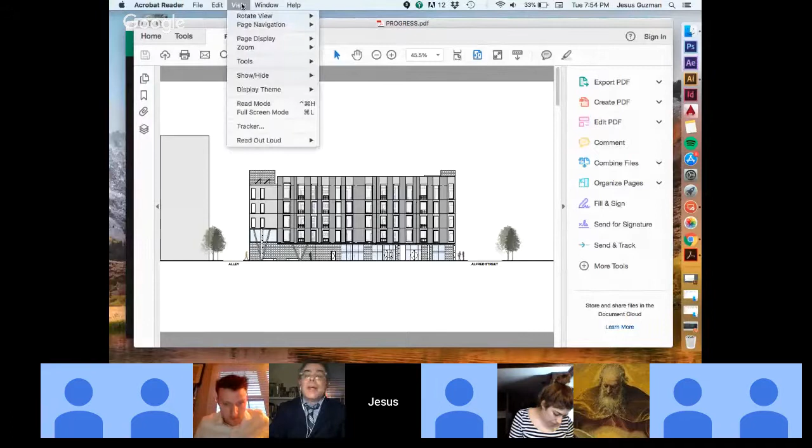Nathan and I spoke yesterday, and we wanted to use today to go over new things we haven't shown yet, to gain feedback instead of repeating what's already been seen. One thing I spent time on over the break was correcting more of the elevations—previously we've always shown a hard surface for our elevations, so I've started adding more shape and geometry to the elevation.

So this is the elevation of John R Street, and the shape and geometry is becoming more like our concept. This is a rendering from Revit. We haven't applied any materials to this yet—maybe that could be done in a large elevation.

Can you zoom in on this? I can try—no, the flat one. So this is the really front part of the elevation, and this is the back building, offset by a couple of feet. If you see my cursor, this part here is flush with the big elevation, and this part in the back is set back.

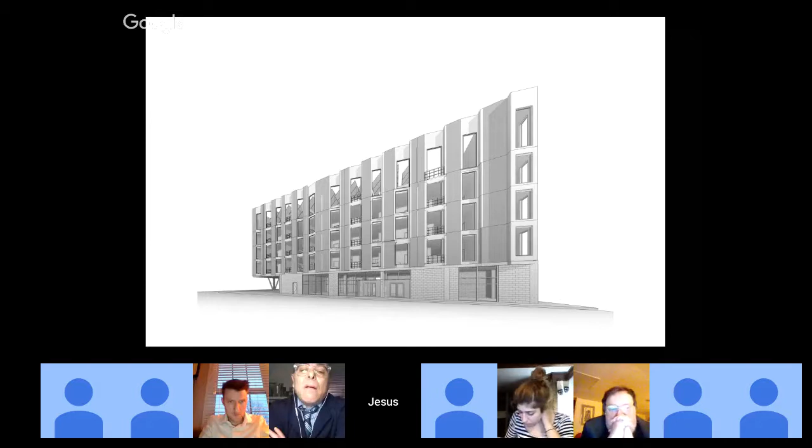This is from the other view we were discussing with the building offset. I think we have to work out how the courtyard is entering from this point. Maybe we could get rid of one portion of the second floor, this piece right here, so it opens up more to the courtyard. But those are units, right? Yeah, maybe that could just be added to the top.

Can you go back to the elevation? And go back to that view. I'm still working on this. So this is kind of an exercise I'm playing around with. Hopefully I can present to you a more detailed diagram of how the facade is working.

What is the skin again? Can you remind me? The exterior along John R and Alfred is the Hardie plank, and the interior courtyard portion is cedar or natural wood. So the Hardie plank is usually a plank, right? It's a 1x4 sort of proportion. Or are you using this as sheets? What are you all thinking?

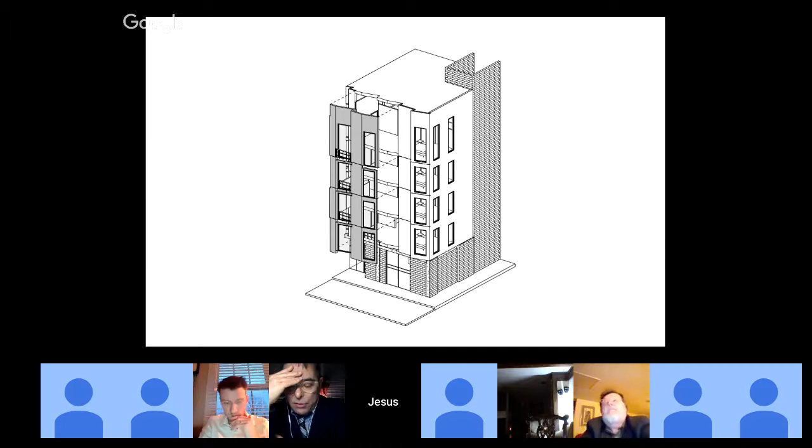We would probably use it in a vertical application, so you can get those types of facets. But you can't get it to run four stories in length, so there's going to be horizontal joints, breaks along the line, and that's kind of why the facade starts to break apart so we can control that. Are you concerned about the butt joint where one vertical plank meets another, and what happens at that moment relative to moisture sitting there or getting driven in at that joint? Do you see it as different from a horizontal joint?

Can I ask, it looks like there's some very large panels there. Does Hardie make something like a 4x8 sheet or a large panel? I'm trying to simplify this even more. Once the actual material starts to show up, you'll see those vertical pieces stacked together. So what you're seeing right now as large plates is actually just material. I don't think there's anything wrong with them. It might actually be an approach to take, but if you're thinking about a large panel system, you might want to look at a cement board or something that comes in a large panel. Does that make sense?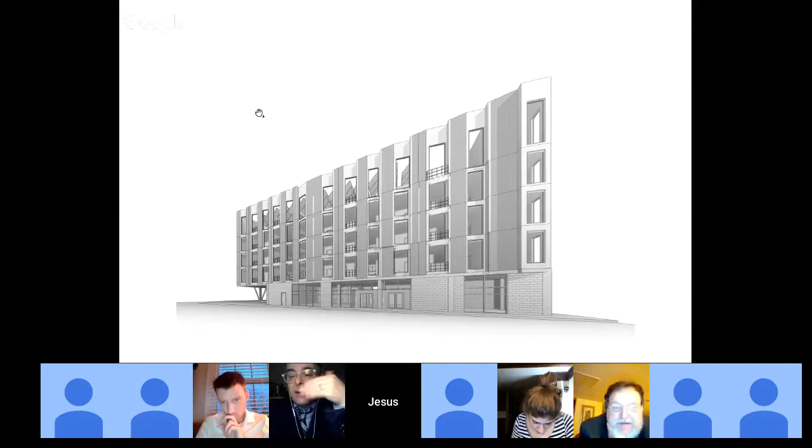Yeah, because it could have a textured or vertical pattern on it to achieve the general aesthetic you're going for. So the faceted idea is one suggestion for the interior side. You mentioned cedar - there's another product, I think it's called Accoya wood, A-C-C-O-Y-A. You might want to look at that as an alternative. I think it holds up very well without staining and treatment, and it might be another alternative to cedar, which is probably going to require staining and treatment.

Yeah, otherwise it goes gray. That's what I was trying to address - in the materials portion of module 2, looking into anti-aging or anti-fungal woods. This is like a composite type system, but it looks unbelievably like wood. It's not like these Trex type products.

Can we go back to the axonometric? So the stuff that's extruded out, the darker gray, that's the Hardie plank panel - that's the panel or planks. And this is like a whole prefab element. There's probably a layer on that, it's got skin, but I'm taking the whole wall off in this diagram. I'm not sure if that's what you're asking.

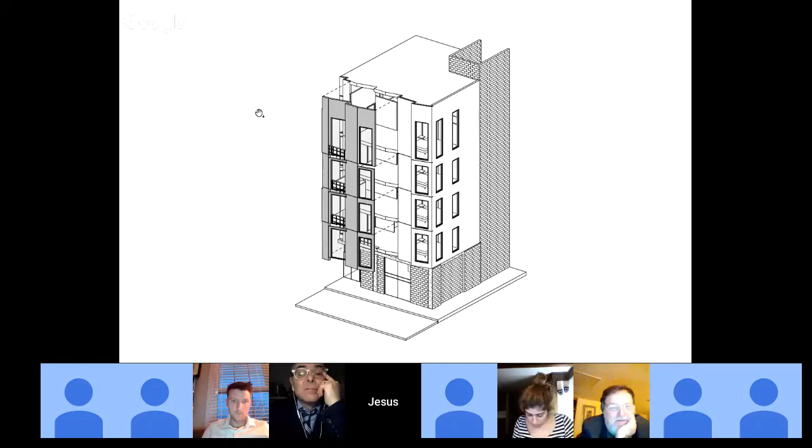Well, I'm just asking what that material is, to be sure. Right now we're not showing any material because we're mainly showing the form of what's becoming of our facade, but we'll show that in most of these drawings. I love this drawing, I think it's great. Personally I have one quick question - are there actually row house conditions nearby in this area? Yeah, it's all like that. That's why I asked, because when you showed that perspective view a moment ago, my first thought was that it has the verticality that reminds me of a row house condition.

I thought if that exists, that would be an interesting correlation. When you look at this flat on, like an orthogonal projection or elevation, it's so interesting, because this elevation doesn't achieve the textural wonder that the axonometric does, or that the 3D perspectives do. So this is a telling point.

This elevation is ongoing. There's still enough there to understand the massing, and yet you still don't get all of it. That's the beauty of drawings. They can go a long way to say things or describe things, but they can't tell you everything. This is a good learning point.

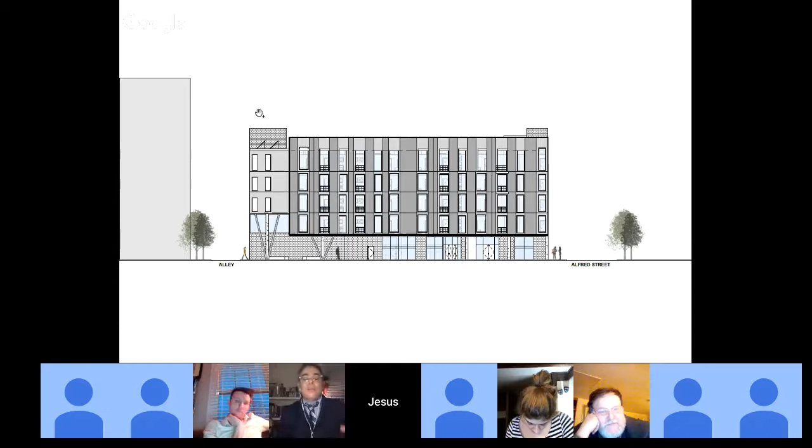Can you show me that 3D perspective that shows that acute corner, the other side? One observation: you might want to think about the variation in the columns and bracket sizes. See how you have the one central column and the two other arms are smaller? You might want to think whether they want to be more similar in size. Normally when I've seen these conditions before, there's a greater equality in dimension and mass, rather than a parent column and two little brackets. But you might want to think about that.

The other question I have, Professor Farlow, part of me almost wants to see maybe a balcony cut into that acute corner, something you could go out into. Yeah, I think we had some opportunity to. Can we go to the plans?

I don't have the plan on this PDF, but you can bring it up. I printed it. Didn't we talk about that before, Jess and Nathan? Can I share my screen real quick?

Nathan, Tracy, my wife came in fourth in her age group, so she's delighted. Tell her I say congratulations. Never ever gotten fourth in my life. I'm not going to say there were only five running because she'd kill me and I'd be sleeping in the garage tonight, but there were a lot of people, and she's pretty excited.

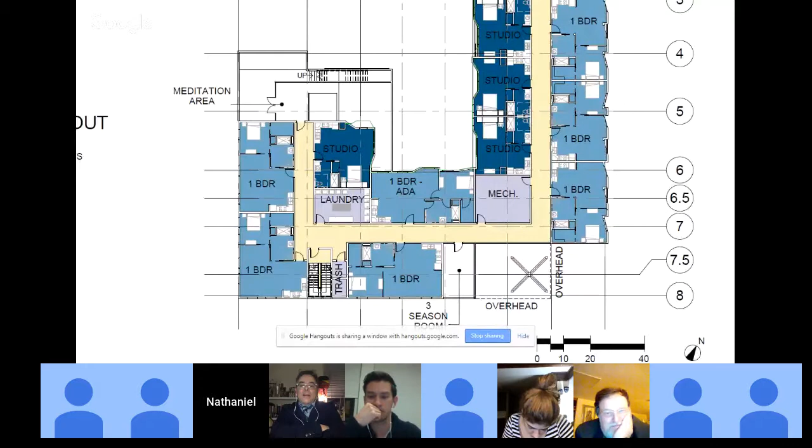So this is that second floor corner condition. Here's that 3-season room we were talking about. I think we're talking about the 1-bedroom on the corner, right, Dan? The perspective view suggests that's not a 90-degree corner to me. It looks like it's 90 degrees here, but much more acute in that perspective. That's definitely maybe some license, I think it's a perspective issue. Those Revit perspectives are pretty harsh. Okay, I can give it back to you, Jess.

That's what I guess Professor Farlow's suggesting. As I understand it, there was a possibility of developing that as a walkout balcony. Well, I think we talked about that before, but I'm looking at a closet there, and I'm looking at a bedroom. The bed is against the wall. It might be worth looking at rearranging that bedroom to allow a sliding door or French door to go out onto a private bedroom balcony facing south.

It would be neat to see people on that wall occasionally, like in the morning. I'm also thinking about the notion of taking advantage of those unique conditions to create something that people would say, I really like this aspect of this apartment, I can't find this anywhere else. And that's why I want to live there, I have to have it.

I would say one of the things I learned over time is that emotion can be very powerful when it comes to environments, particularly residential. People at the higher end become more attached to emotional conditions like that, and they're therefore willing to pay for it, because they can afford to.

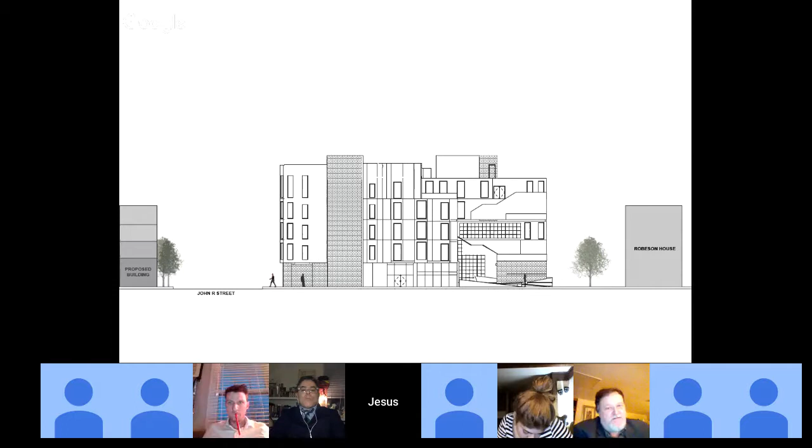Oh, this is interesting. This is a change we've made to the courtyard. On your right you can see the process of terracing. So now there's stairs for each terrace, and this can be seen a little bit in the section. You're going from the 5th floor all the way to the 2nd. I'm still missing a stair to ground level.

I'm just thinking, do I want to close off this corner? It's something I'm considering from the last review, for security purposes.

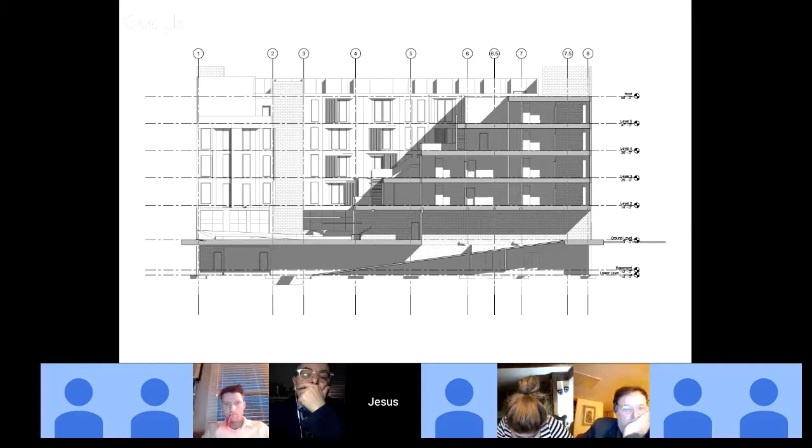So now the terraces on the courtyard are stepping down, and it's designed so anyone can go from the 5th to the 2nd floor, and maybe there's some interesting spaces happening on those terraces. Maybe one terrace is for relaxing, and we have a relaxation room on the second floor. So this is ongoing, hopefully.

Can we go back to the 3D view? Can you zoom in, where the cursor is? And then on the facade of the courtyard terrace, I've been working on adding some louvers onto the windows because of the sun exposure.

This isn't a very well thought out thought, but since you're potentially open to this critique about that stair, and I'm hearing it's not completely resolved yet, I do feel like the stair and the armature holding it up -- I'm not convinced that armature needs to be there. It feels like it's getting heavier and clunkier, and the ability to see through the entire development is getting more eclipsed, more difficult.

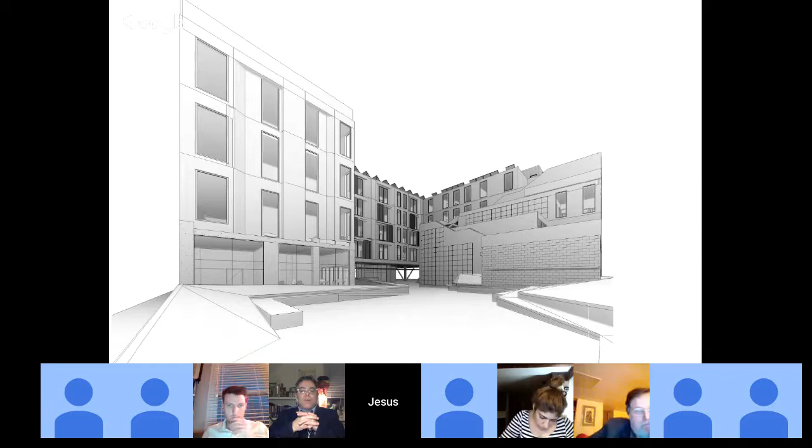I feel the same way. So if you're feeling that way too, maybe try to act on that instinct and let this comment help guide you. I just feel like there's a couple of languages colliding here. There's something about the language of Brush and Alfred that's turning the corner pretty deftly on the left, but then that language starts to change as it gets more toward the courtyard.

I think the material's changing, so maybe it needs to change. But then it gets into this different, more reticulated grid, this more opaque thing that's altogether a different language than everything else around it. If that's what you're intending, I want you to be clear, or clearer, about that intention.

Yeah, this is a change I worked on over the weekend, and this is the result. This is where I am right now, so that's why I didn't have any drawings -- I didn't want to waste time making drawings for this.

But I feel the same way, and maybe I was thinking of flipping the stairs so it still opens up to the courtyard, because it does eat into it a little on this one.

And whatever you're seeing on the stairs, like this grid, this lattice, that's supposed to be the green wall, so that's softer and could be maybe a little more translucent. It could just be like a 2x2 steel tube, welded into a grid so you could actually see through it in the winter, but in the summer it gets a little thicker and more vegetated. So that's maybe an option.

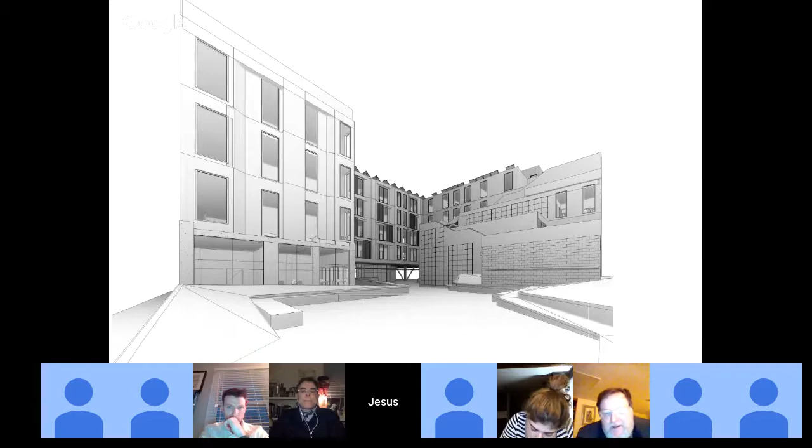But it's reading like scored block right now, if you know what I mean. I'm also wondering why there's no glass on the right-hand side, where it looks like it's all brick. That's a space that doesn't need glass -- behind that is, I believe, one of the mechanical rooms.

Can we go to that plan real quick? Because I think we obviated some chances to provide glass in those rooms. Pull it up again if you want -- Nate has that, I think. Didn't we talk about that?

So we talked about including glass along this wall, along here, for security, to keep some eyes on it. You're just not indicating it. You've changed this a little bit since the last time, maybe since the review.

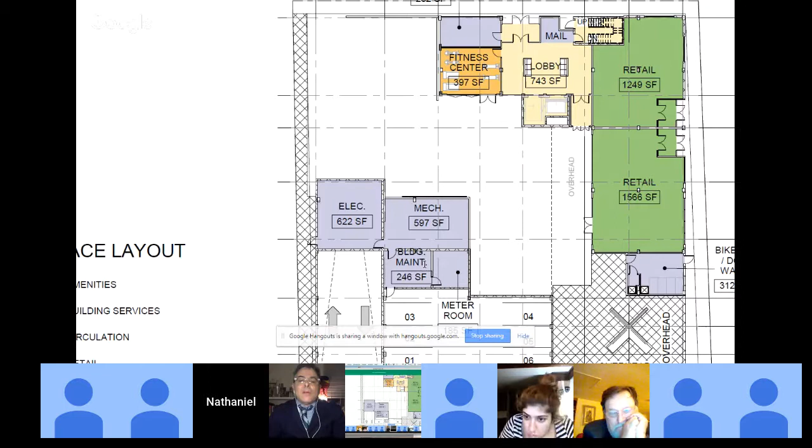There might be some opportunity for windows, like in the electrical room on that wall you've got your cursor on. Maybe an opportunity for a slit window, just to let light leak out of it at night, or to bring daylight into it, but not a large window, because that kills the utility and usability of that room.

Because walls are sacred in these mechanical and electrical rooms, since they're hanging panels or running conduit up to them, so those walls are really precious. So if there are any windows, maybe they're just vertical slits near the intersection of one wall running north and another running east. Or maybe there's a door with glass in it, for example.

The electrical room probably needs a second means of egress there. Oh, you've got it. Thank you.

Make sure that where that wall is on that column line, you have the head clearance as we're dropping, as we're slipping underneath it. It looks pretty cozy. Personally I'd never have a problem walking under that, but make sure you get the vertical height for when a car is making its way down that ramp. It looked a little snug. Yeah, it did.

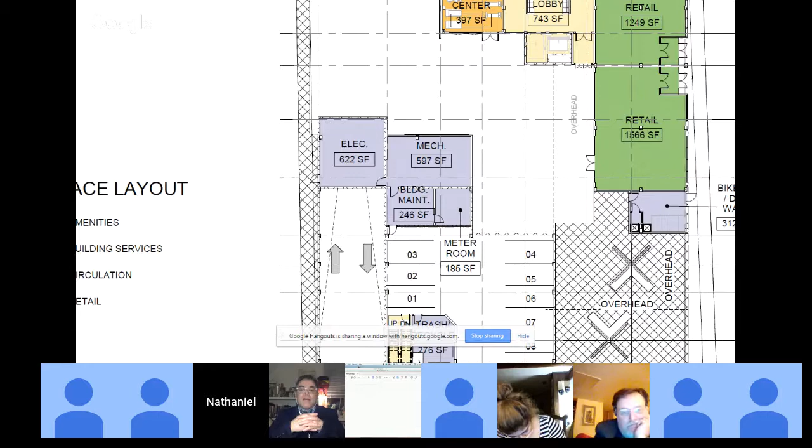Did you have more, Jess? That was actually the last one. Okay, I've also got some HVAC stuff. Do we want to work on structural or have a conversation about structural before? You're leading the conversation, so let's start with the HVAC.

All right, let me share my screen again. So last we talked, I was showing a... you haven't shared it yet. I know, you're leading up to it. It's a PNG so it's not going to show itself properly. It's not letting me share it. I'm going to export it real quick.

But last we had talked, we had the hydronic system trying to bring that warm water into our floor, which would then radiate. Right, I remember, a comfortable floor.

I've looked more into how we can use solar panel energy, since geothermal is no longer an option, how we can contain some of the water, and how each floor would work. There was conversation about trying to have one distribution system on each floor, and instead, the way the hydronic system works is you'd have different zones to warm different rooms so you could control that, where in reality, on our floor plate, you could probably have that for the entire floor plan.

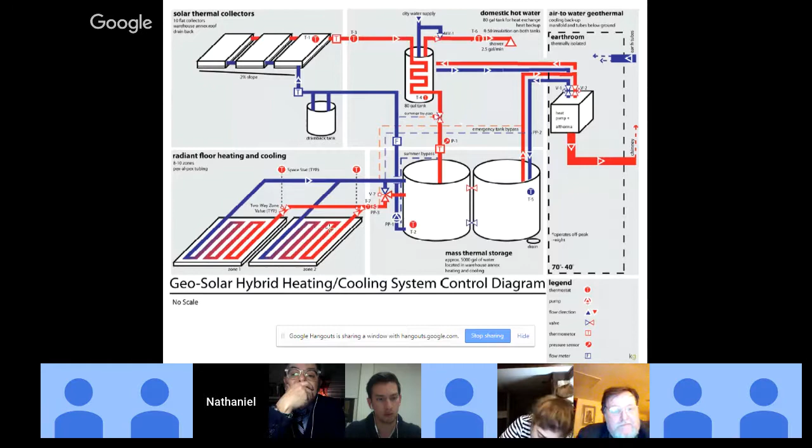And then to answer the question about fresh air, condenser units, I've started to identify locations on condenser units. So I'm going to switch PDFs to show you. Can you see my screen again?

Yes. Okay, so on the upper levels I've started to identify the location of where condenser units could be located to bring in that fresh air, which I found almost every simple small time condenser unit provides about 18,000 BTU, which would be more than adequate for an entire unit. I think that's just shy of 1,000 square feet, and our biggest unit's 966 square feet. So that would help bring some of that fresh air in.

And then to work in our amenity spaces, our normal spaces, what I've tried to do is create a central location, more of a high efficiency vertical stack, or some way to get centralized air from our mechanical room, and then start to distribute that through our first floor, and then have a secondary that pumps into our upper floors through that mechanical room. So the red line represents one zone, the orange line represents retail 1, and the blue line represents retail 2. And these shades of purple represent an entire zone, and so forth for these two. And then the green line ties in to provide fresh air and air within each floor plan along the corridor space.

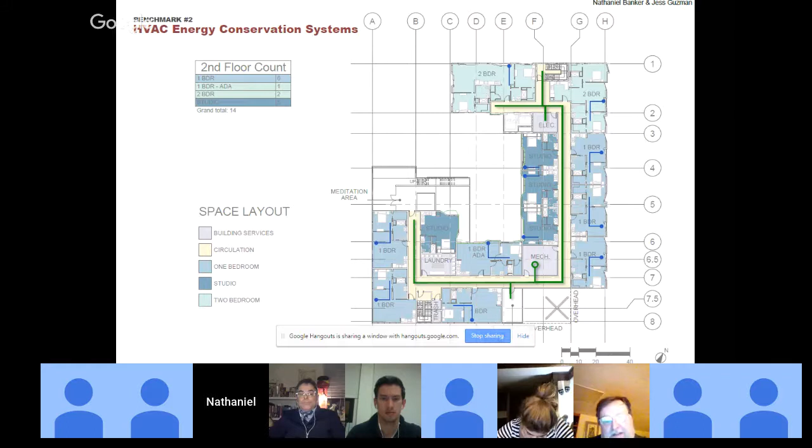Now that said, go to your main lower level, the ground floor. Now you've got a more substantial floor area there, right? I mean, possibly you could go back to a hydronic there, but, you know, again, I'm starting to wonder whether or not you want to start mixing that system again.

Or you just keep it simple and work with a heat pump system that feeds refrigerant or fluid, and keep the emitters in the solar thermal array up there. I'd love to keep that photovoltaic array up there. What could we use that for?

Well, the array that he has - let me back up. The only comment I'd have about that array idea is I'm not sure you're going to get enough heat from that to actually support conditioning of the units for space heating through hydronics. I think you'll be able to use it more effectively for domestic hot water. Does that make sense? Because you have a fairly cloudy sky condition here in Detroit. You understand what I'm getting at? Yeah, you're not going to have a high level of radiant energy production.

I think if you were to use that, through the heat exchanger like you're showing us in that one diagram, as a way of preheating hand washing water before it goes into something like an on-demand hot water heater, you'll get some energy out of that system to do that. That's all I would try to accomplish with it at this point. I don't think I'd try to condition floor spaces at all.